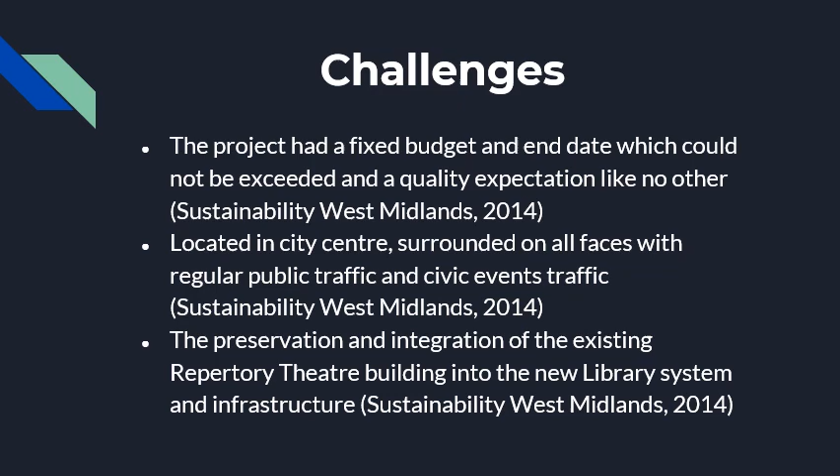Facade materials. Prater and Lindner facades provided the roofing and facade. They installed cladding with Kingspan composite panels and single skin cladding sheets. They also produced capping to the perimeter roof upstands using aluminium powder coated products.

In total, Prater has waterproofed 7,500 square metres of the library, which also includes an area on the ground level podium along with a biodiverse roof garden. The library is surrounded in 8,500 square metres of unitised facade with a feature of curved aluminium.

The 5th and 6th floors were constructed with 3 metre wide and 6.5 metre high gold anodised cladding. Richter states that there was also 1,500 square metres of steel framed ground floor glazing with soffits and also a number of bespoke doors.

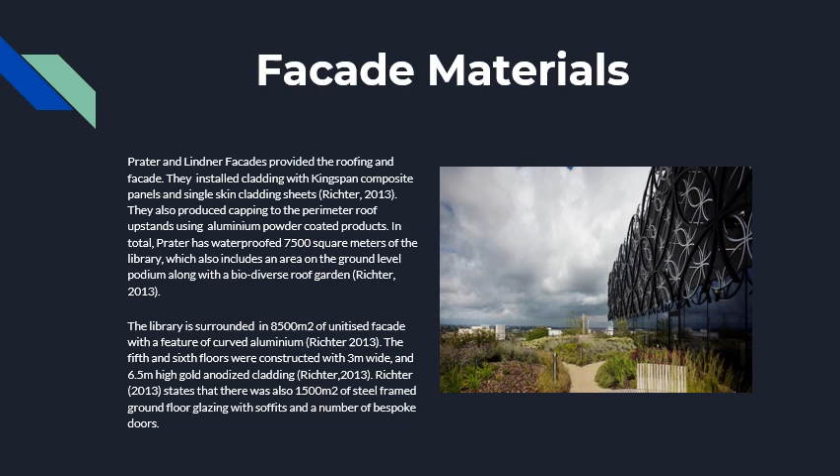Mecanoo. The library was designed by architect Francine Houben, who worked for the Dutch studio Mecanoo. She explained that she wanted the library to be a people's palace. She also wanted the library to be a warm and welcoming environment, enticing everyone in, not just the rich and intellectuals. The library is made up of 4 stacked large cubes.

It includes a sunken amphitheatre, and part of the library extends beneath a public square. There are reading rooms that branch out from a staggered rotunda. Allowing a lot of light into the building was a major concern of this project. As a result, large portions of the building were faced with glass in order to do this.

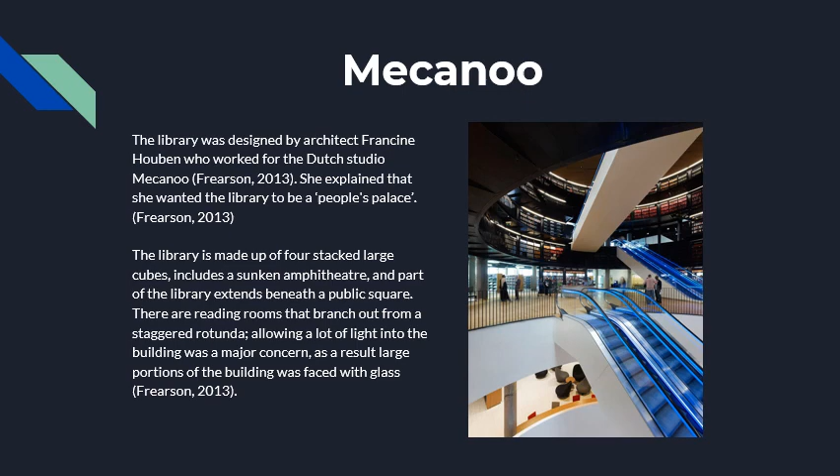Construction systems. The Library of Birmingham used a heavyweight construction system. In achieving this, the Library of Birmingham makes use of a concrete structure, comprising efficient post-tensioned concrete slabs, concrete transfer walls, and concrete arches.

The use of this heavyweight concrete structure helped the Library of Birmingham achieve excellent BREEAM status by ensuring that thermal mass was incorporated into the library's construction, developing efficient operational energy usage. This was a key aim of the project from the start, with energy efficiency being one of the main focuses.

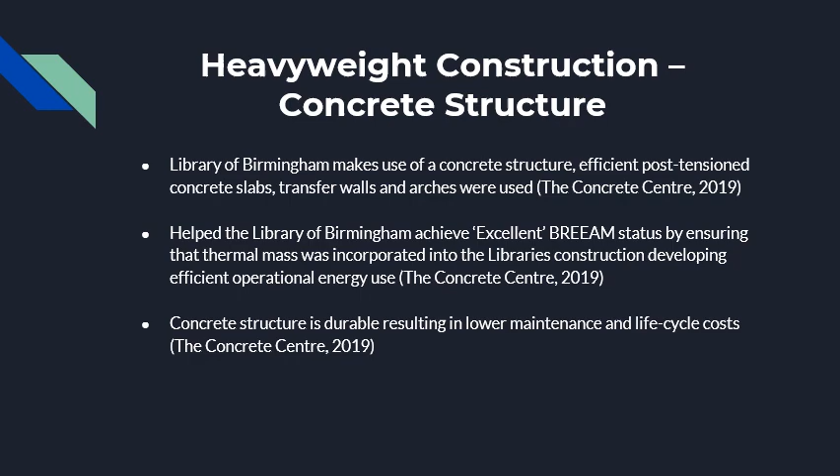Concrete structures are durable as they result in lower maintenance costs and also lower life cycle costs when compared to other construction systems such as timber frames. The concrete structures are also inherently fire resistant. This results in superior levels of public safety and protection, which is of importance in public structures that receive as much foot traffic as structures such as the Library of Birmingham.

Carillion decided on the use of a concrete structure over a steel frame structure, as this solution benefited from smaller delivery loads to a congested site, minimising the effects of the difficult city centre location, whilst also reducing programme duration, which in turn helped to lower the costs of the scheme.

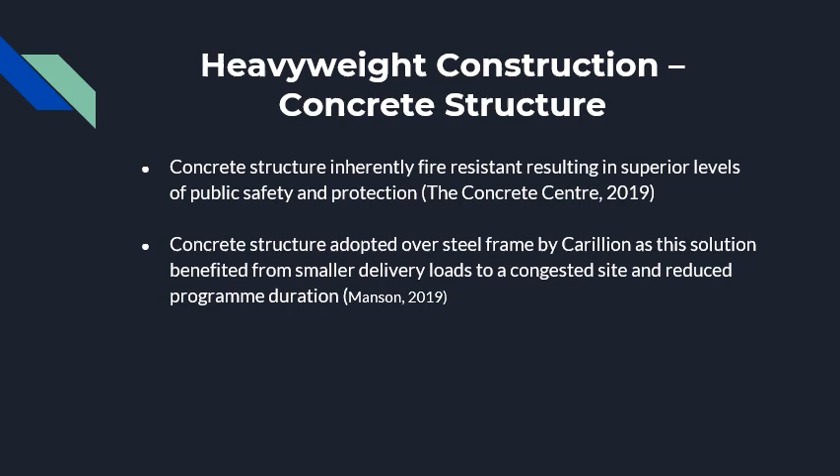Steel frame ground floor glazing. However, Birmingham Library does also incorporate the use of steel frames for its ground floor glazing as well as other areas. The benefits of this include that steel creates a lightweight frame, which when compared to the usual concrete is certainly true. This is of vital importance in the construction of large buildings such as the Library of Birmingham, where the weight of the building can be enormous.

Any weight saving has the potential to drastically reduce the costs via reducing the costs and size of the substructure. This is because foundations are not required to be able to bear as much weight if steel is used in place of concrete.

Rodrigues also states that steel frames may be a quick and high quality solution to deliver zero carbon housing without compromising the user's comfort. However, steel frames might present a risk of overheating today and in the future, with Rodrigues going on to say that simulation has shown that a low-energy house studied is likely to overheat.

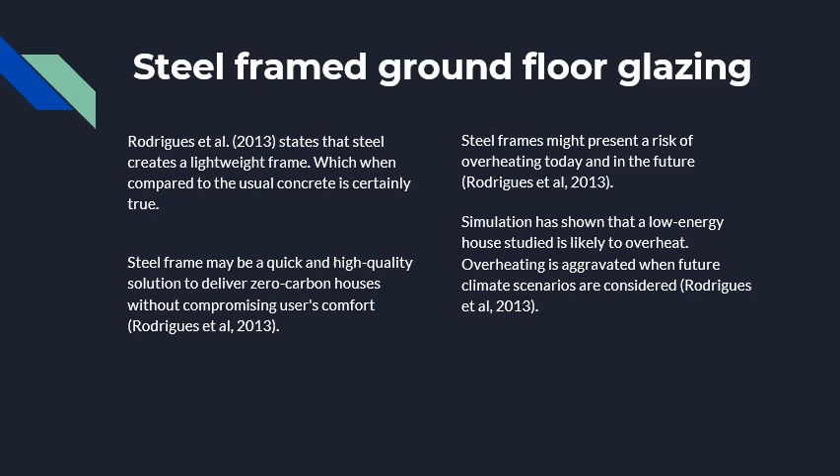Overheating is aggravated when future climate scenarios are considered. Whilst this study was conducted on a house, its implications may also be seen in larger structures, such as the Library of Birmingham.

Aluminium rings. The Library of Birmingham is also clad with a skin of overlapping aluminium rings to represent the City of Birmingham's craftsmanship. Aluminium is a good material to use for this, as it is extremely lightweight, along with being highly resistant to corrosion. Aluminium oxide actually has the effect of strengthening the aluminium.

Aluminium is much more expensive than steel, although the installation of steel cladding could potentially be of greater cost, as larger cranes would be required for the installation due to the increased weight of the steel. It also has to be considered that steel would rust, and as the aluminium rings are for aesthetic purposes, this would not be beneficial for this scheme.

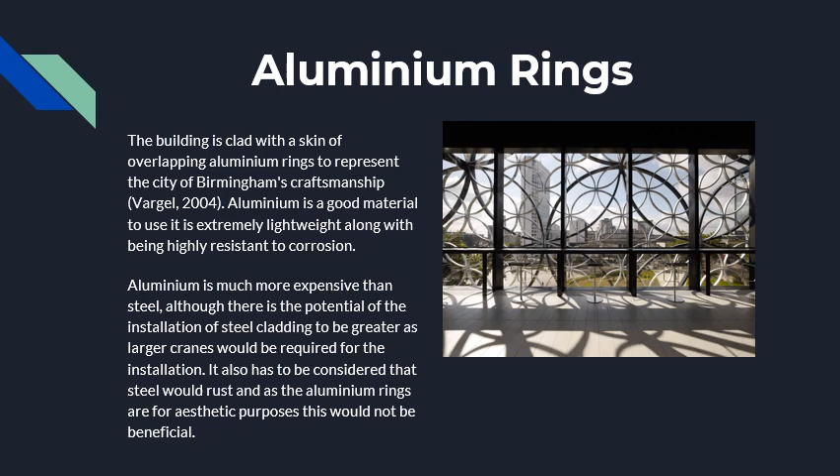Substructure. The site and ground conditions. The Library of Birmingham site lies near a listed building with shallow foundations. As well as this, there is also an underground railway tunnel which runs near the site. Due to this, the extent and depth of the basement had to be considered thoroughly in order to minimise any impact on these structures.

Alongside this, ground conditions included contaminated canal basins, overlying soft natural materials, and overlying rock. Due to this, the Library of Birmingham's basement was set to be at rock surface level. This enabled soft ground materials and contaminated material to be removed more easily, whilst also eliminating costly excavation further into the hard rock, and at the same time, the hard rock provided a stable foundation for the building to be built upon.

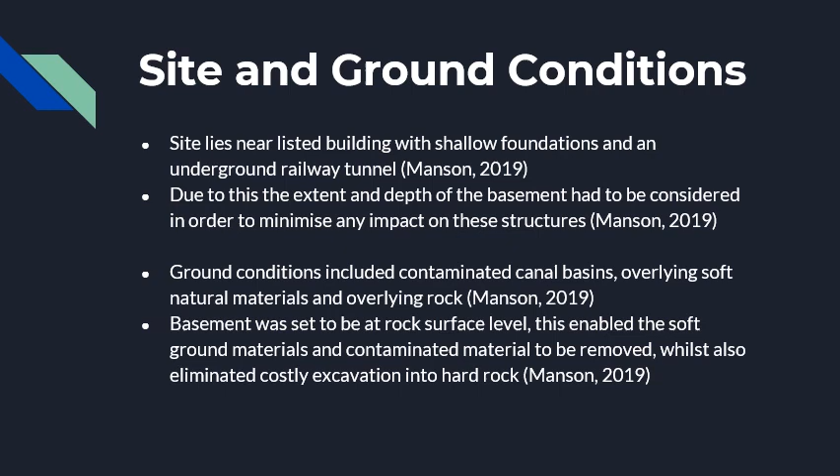The Library of Birmingham's foundations are made up of a combination of bored piles and pad footings. The use of pad footings has an advantage over piles in that it reduces costs and reduces the foundation programme due to the easier and cheaper installation of these foundations.

However, bored piles were also necessary. Bored piles in sandstone were used due to their capacity to carry large loads and to minimise disturbance to neighbouring properties when compared with other piling systems. Due to the size of the Library of Birmingham, piling was essential. Bored piles were deemed to be the least disruptive use of piling.

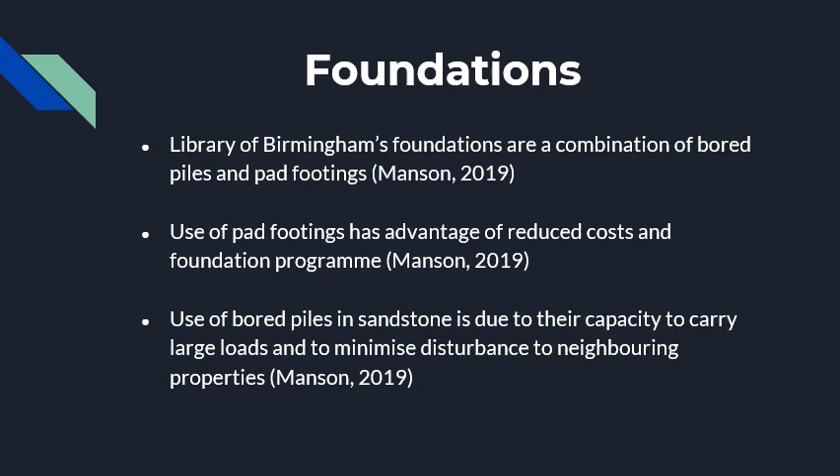Environmental considerations. Aquifers. Carillion was recognised for its excellent work when it came to managing the environment. They installed an aquifer ground source cooling system at the Library of Birmingham. It is a renewable energy source that uses groundwater to provide the library's heating and cooling system.

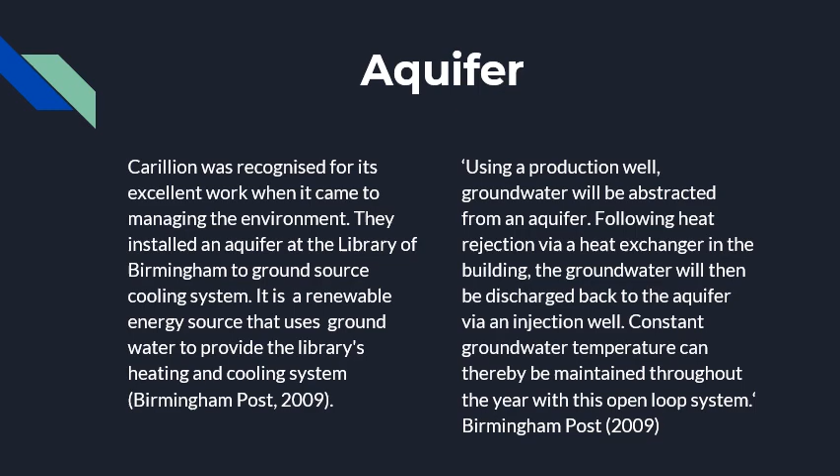It achieves this by using a production well. Groundwater will then be abstracted from an aquifer. Following heat rejection via a heat exchanger in the building, the groundwater will then be discharged back to the aquifer via an injection well. Constant groundwater temperature can thereby be maintained throughout the year with this open loop system. This further helped the Library of Birmingham achieve its excellent BREEAM status.

The Library of Birmingham also benefits from its use of green roofs. Green roofs are widely regarded to create conservations and restore habitats. They also have greater ecological diversity than the standard roof and can provide a habitat for rare species of birds.

However, Williams et al. state that there are few studies that have strong enough proof that they are truly beneficial, including repetitive testing of ecological studies regarding green roofs.

There's also the fact that whilst green roofs may help improve biodiversity on the green roof, they may not match ground level diversity restoration projects. It should therefore be considered whether ground floor restoration projects would be more beneficial to the scheme before proceeding with the green roof.

Grey water usage. Grey water is wastewater from urban areas. This water can come from showers, hand basins, washing machines, but excludes toilet streams. This is most likely due to the fact that this brown water would contain dangerous pathogens.

Grey water has low-level pathogens that could contaminate, and nitrogen, meaning it is receiving more attention as it has potential to be reused. Whilst recycling is always seen as a positive, specific guidelines for grey water reuse are unfortunately not available. Li et al. raises the issue of the treatment for grey water. This could mean that grey water recycling techniques can vary widely, which raises issues of costs. Also, public perception may be an issue.

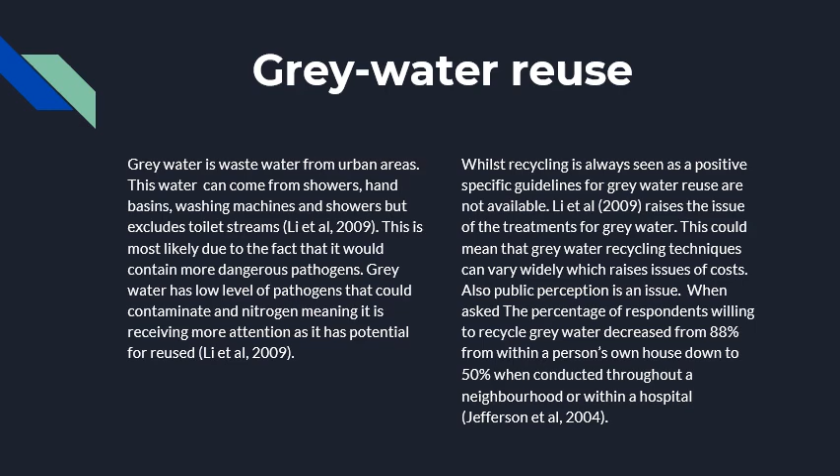The Birmingham Library uses single skin cladding sheets. However, this may not have been the best option. Single skin claddings are not particularly great for insulating sound and noise. The sound reduction of single skin cladding displays pronounced dips in the mid-frequency range. These dips can cause single skin cladding systems to be inferior when insulating sound.

As a result, the Library of Birmingham may have benefited from double skin cladding. This is because it reduces heat loss by reducing the speed of airflow entering and leaving the building, maintaining a more steady temperature.

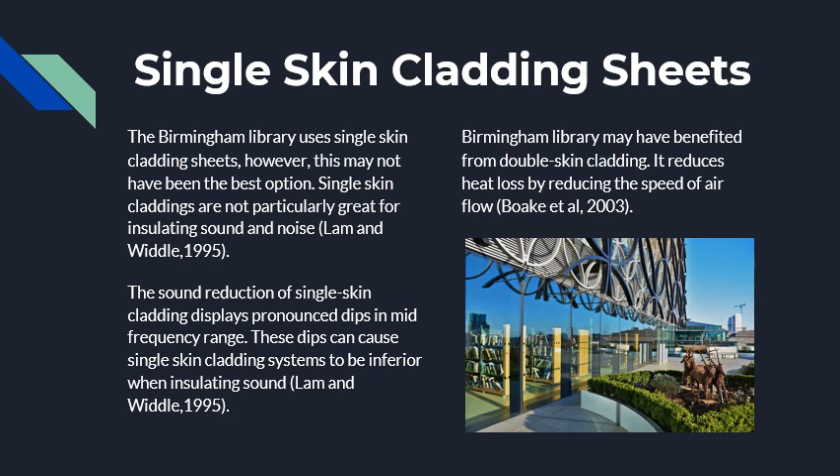Birmingham Library have also incorporated Kingspan composite insulation panels into the construction of the library. The growing use of high-performance composite materials has increased the development of the design of these laminates. Due to their high strength, composite plates are usually thin laminates. This has the advantage of reduced weight, but their thinness can often mean that they can buckle.

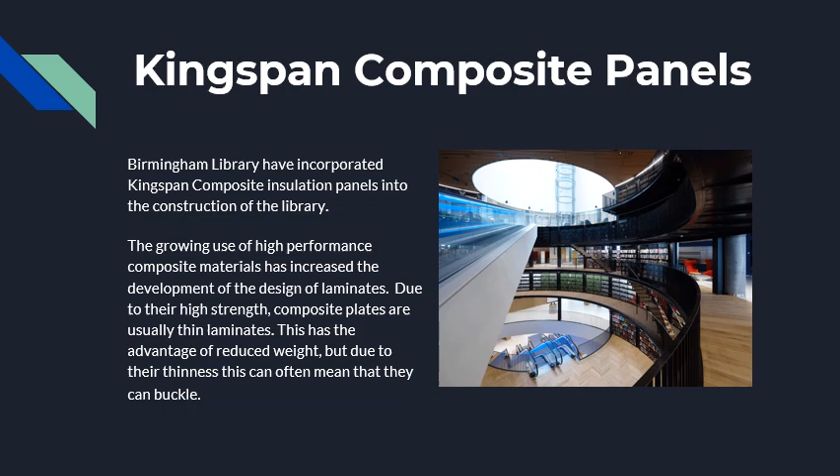The wide use of natural light across the Library of Birmingham has also added the advantage of reducing costs and emissions from electricity. The Library of Birmingham has, where possible, taken advantage of natural daylighting to provide a comfortable environment throughout the building. The Library of Birmingham's lighting matches the architectural structure of the building while providing the necessary lighting for each floor level.

Lighting is largely delivered from high-level downlights to meet the Chartered Institute of Building Services Engineers' recommendations for light levels for the wide variety of spaces across the floors. To meet the energy targets of the building, the downlights are warm colour temperature metal halide fittings with integral electronic control gear, the most energy efficient systems currently on the market.

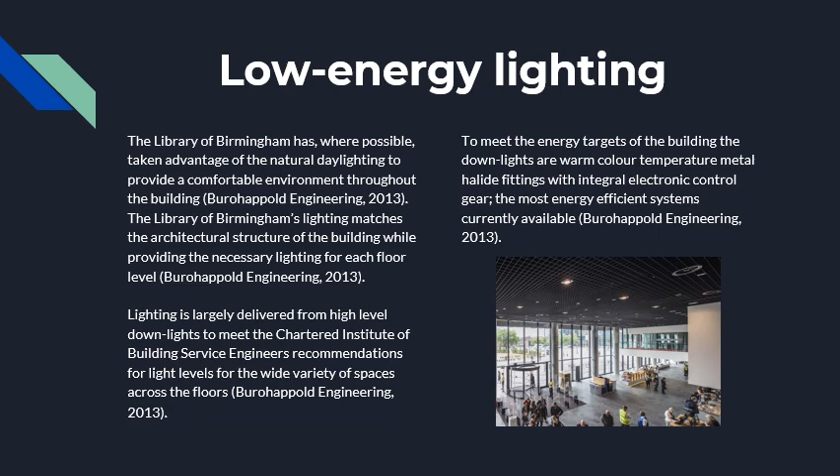Finally, the Library of Birmingham incorporates the use of a CHP unit. CHP stands for Combined Heat and Power, which captures and utilises the heat byproduct from the electrical generation. It is believed a CHP system can reduce carbon emissions by 30% and save energy costs by 20%, further increasing the energy efficiency of the Library of Birmingham.

The extra heat generated by electricity production is matched to where heat is in demand, which alternatively would have been supplied by an additional boiler. CHP systems are highly efficient, making use of the heat which would have otherwise been wasted.